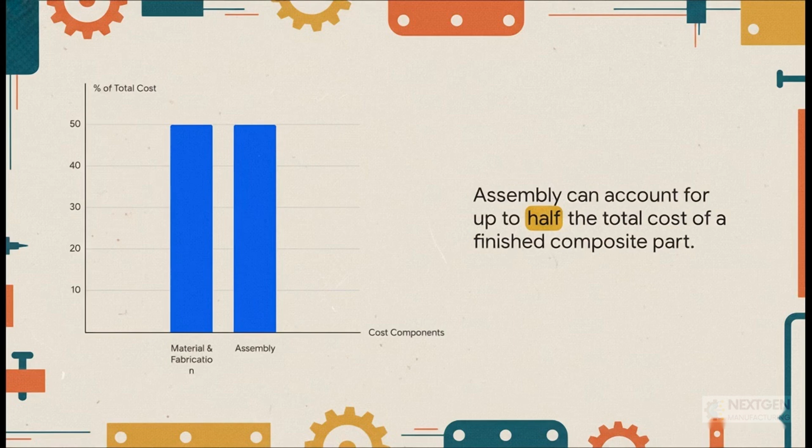Assembling these amazing materials is shockingly difficult, super time-consuming, and unbelievably expensive. Just take a look at this, it really puts it into perspective. The cost of the material itself and making the initial part, that's only half the story. The final assembly, all the trimming, drilling, and fastening can eat up to 50% of the total cost of a finished part. That's just a huge hidden chunk of the budget.

So that leads us to the big question, the one we're here to answer. Why is a process that sounds as simple as putting pieces together so ridiculously complex and costly when you're dealing with composites? Well, let's find out. To get to the bottom of this, we're going to go on a little virtual factory tour. We'll start with making the perfect cut, then dive into the high-stakes world of drilling without causing damage, check out the incredible art of fastening, and finally, look at the all-important final touches.

First stop, making the perfect cut. So a composite part comes out of its mold, and it's got these rough, uneven edges. They need to be trimmed down to exact dimensions. But you can throw out everything you know about sawing a piece of wood or metal. This is a completely different ballgame.

Here's the thing you have to understand. It's all about the material itself. A piece of metal is pretty much the same all the way through, right? It's ductile. When you cut it, the little metal chips that fly off actually carry away a ton of heat. But composites? They're the total opposite. You've got these incredibly strong, abrasive fibers, like carbon, just sitting in a much weaker, brittle resin that's a terrible conductor of heat. It just doesn't get rid of it.

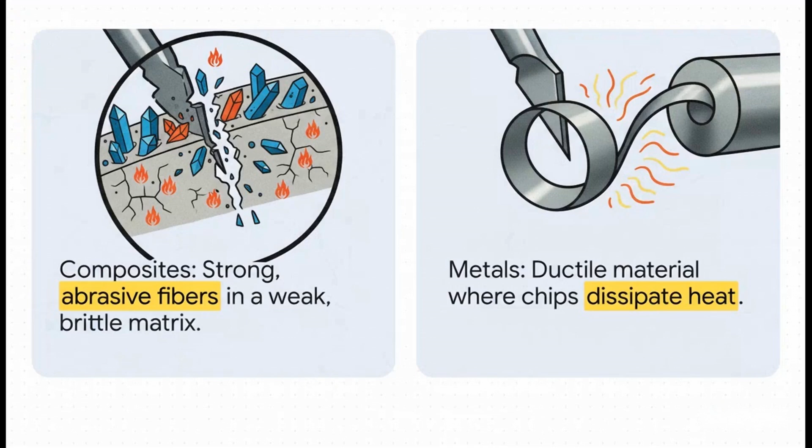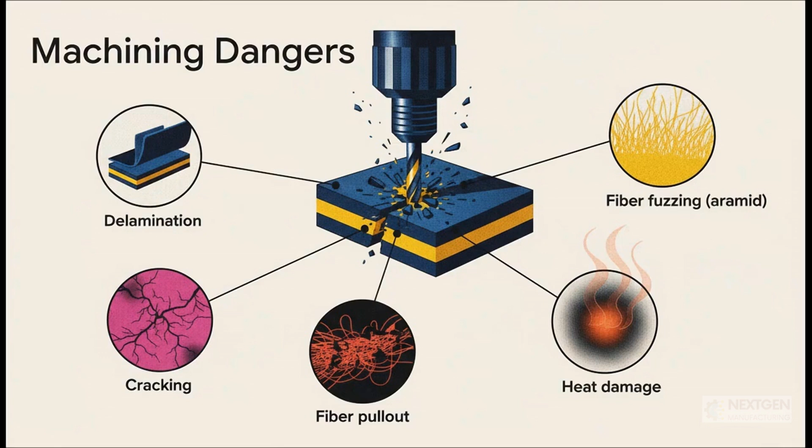And because of that weird structure, you're walking through a minefield of potential disasters. If you use the wrong tool or just the wrong technique, you don't just get a sloppy edge. Oh no, you can cause delamination, where the layers literally start peeling apart. You can get tiny cracks, fibers getting ripped out, or even heat damage that ruins the resin. And with something like Kevlar, you get this annoying fuzzing effect instead of a clean cut. Any one of these things can seriously weaken the part.

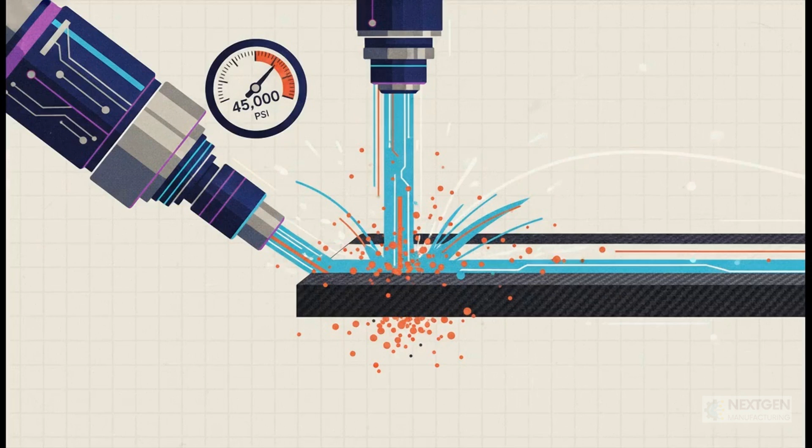So how do you cut a material that absolutely hates being cut? Simple. You don't. You erode it away. The go-to solution in modern aerospace is the abrasive water jet. And we're not talking about your backyard power washer here. This is a razor-thin stream of water pressurized to over 40,000 psi, mixed with a super sharp abrasive grit. It literally blasts the material apart on a microscopic level.

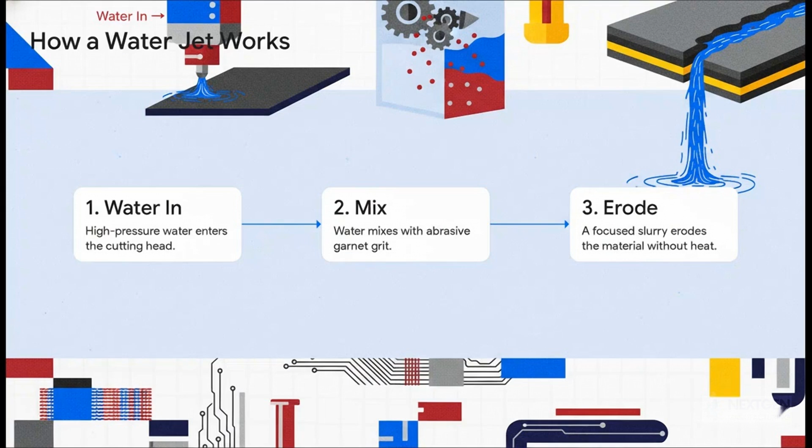The way it works is both simple and kind of brilliant. You've got this super high-pressure water that goes into a mixing chamber. In there, it creates a vacuum that sucks in these tiny, sharp particles of garnet. Then, that whole mixture, the water and the grit, gets shot out of a tiny nozzle as this focused, high-speed slurry. It's so powerful, it just erodes the composite cleanly, with almost no physical force on the part, and most importantly, no heat. Problem solved.

All right, on to our next station, drilling without damage. So our parts are neatly trimmed, now we need to drill a bunch of holes in them so we can fasten them together. Sounds easy enough, right? Wrong. In the world of composites, every single hole is a precision, high-stakes operation.

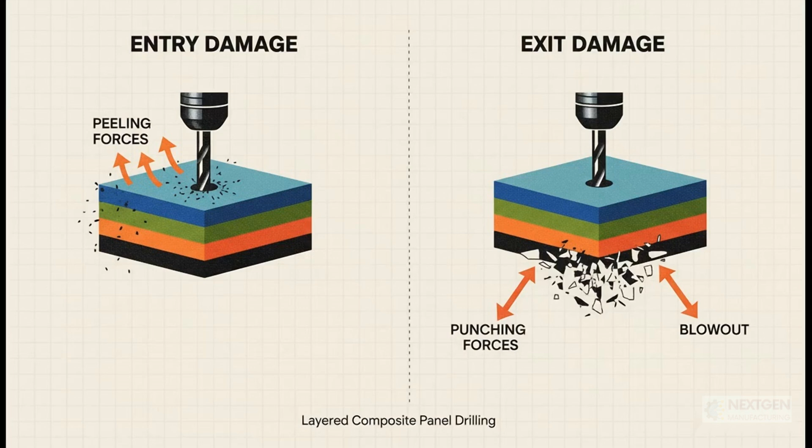And here's the heart of the problem. As a drill bit starts to enter the top of the composite, its sharp edges grab those top layers and create a peeling force. Think of it like a splinter on a piece of wood. Then, as the drill is about to punch through the other side, it creates a punching force that can just blow out the back surface. You can end up with a mess on both sides of the hole you just tried to make.

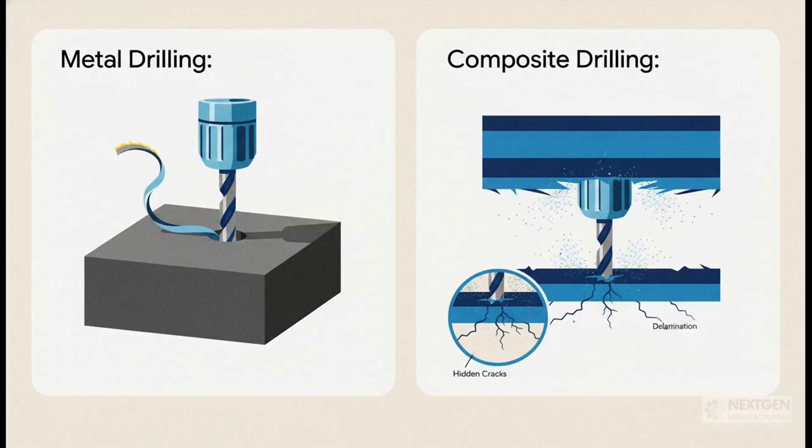And again, let's just compare that to metal for a second. With metal, a regular drill bit just peels away a nice, continuous chip. It's clean. But with a composite, that same drill is basically punching its way through a stack of brittle poker chips. If you get it wrong, you're not just making a messy hole, you could be creating hidden damage inside the part that could cause it to fail later on.

The only way to solve this is with some seriously specialized tools. There's no one-size-fits-all drill bit here. For carbon fiber, you might use a special dagger-style drill that shears the fibers cleanly. For something like aramid that loves to get fuzzy, you need a special C-shaped edge that actually pulls the fibers tight before slicing them. Each design is a custom-engineered solution for a very specific problem.

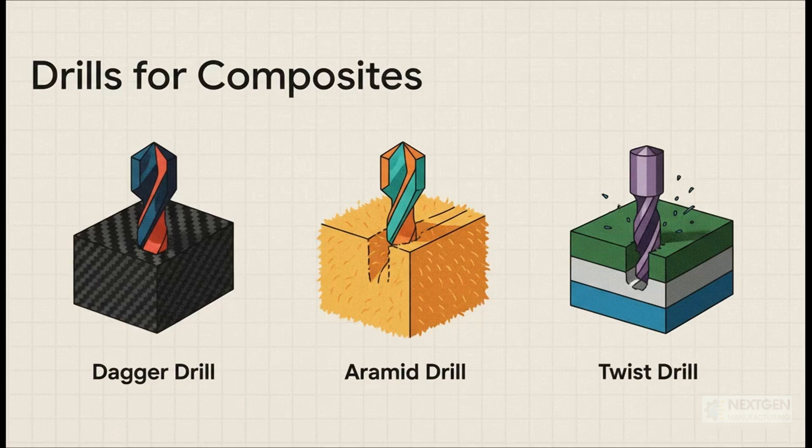But the shape of the drill is only half the battle. What it's made of is just as critical. See, carbon fiber is insanely abrasive. A standard high-speed steel drill bit, you'd be lucky to get 2 decent holes out of it before it's toast.

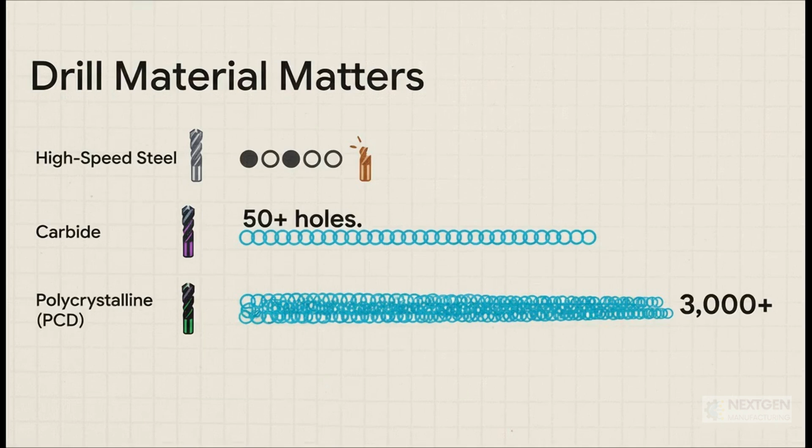If you upgrade to a carbide drill, you can get over 50 holes. But for the big-time automated production lines, they use drills tipped with polycrystalline diamond, or PCD. They cost a fortune, but one of them can drill thousands of perfect holes. It's the only way it makes economic sense.

Okay, so we've cut our parts, we've drilled our perfect holes. Now for what might be the most critical step of all, the art of fastening. This is where all that insane precision we've been talking about really has to pay off, because how you hold these parts together is a complete science. So before we can even think about what kind of bolt to use, we have to have a quick chemistry lesson. We need to talk about galvanic corrosion.

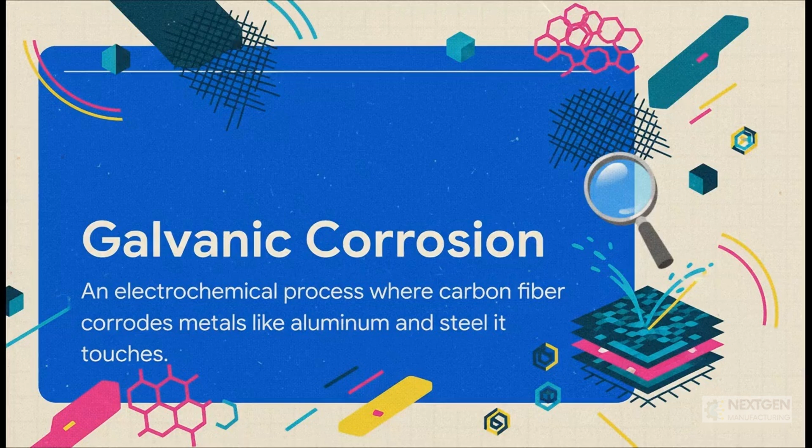Carbon fiber is conductive, and if you put it right next to a different metal, like aluminum, you basically create a tiny battery. And guess what happens? The aluminum starts to corrode and just wastes away. That is why you always see super expensive titanium or special stainless steel fasteners in carbon fiber structures. They have to be chemically compatible.

Now get a load of this number, 5/1000ths of an inch. That's thinner than a sheet of printer paper. If the gap between two composite parts you're joining is any bigger than that, you can't just tighten a bolt to pull them together. The bending force would literally crack the brittle resin around the hole. Instead, a technician has to precisely measure that gap and fill it with a custom-fit sliver of material called a shim. The level of precision is just mind-boggling.

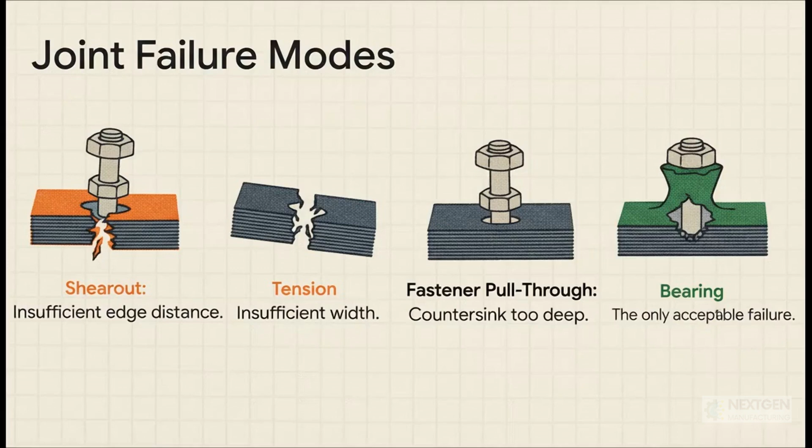And the stakes for getting any of this wrong are absolutely huge. A joint can fail in a bunch of catastrophic ways. The fastener can tear out the side of the part, it can pull right through the hole, or the part can just snap in half. The only way a joint is designed to fail is in what's called bearing, where the hole just slowly stretches under an extreme load without ever breaking apart completely. Every single detail is designed to make sure that's exactly what happens.

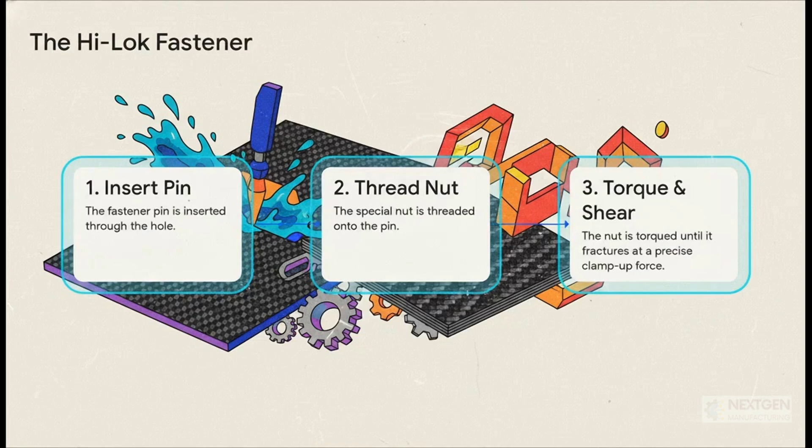So to get that perfect joint, engineers use these amazing little devices like the Hi-Lok fastener. It's a two-piece system. You stick the pin through the hole, and then you thread on this special collar. A tool holds the pin still while it tightens the collar. And here's the genius part: when it reaches the exact perfect torque, the top of that collar is designed to just shear right off. It's a foolproof way to get the exact same clamping force every single time.

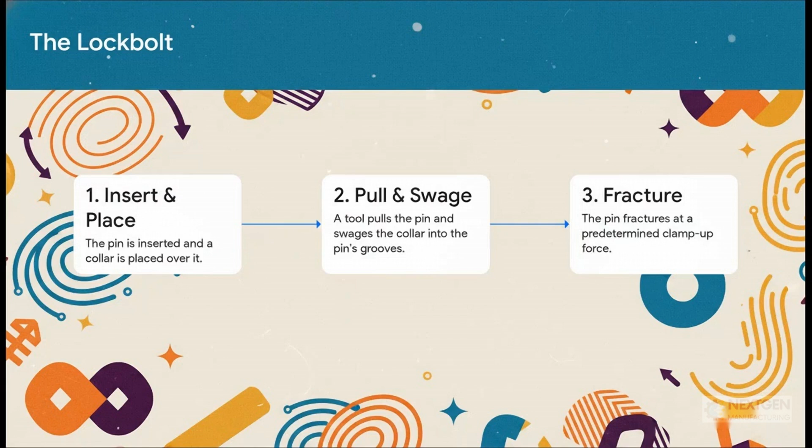Another really cool one is the lock bolt. This one doesn't even use threads. The pin has grooves instead. You put the collar over the pin, and a special tool pulls on the pin to clamp the parts together. Then it swages, or basically squishes the collar material down into the pin's grooves. This creates an incredibly strong vibration-proof joint. And just like the Hi-Loks, the pin then breaks off at a precise tension, guaranteeing a perfect clamp up.

We are so close to the finish line. Our parts are cut, drilled, and perfectly fastened, but we're not quite done. The final assembly stage is all about the critical finishing touches that are going to protect this structure and make sure it does its job for years or even decades. This comes down to two last vital steps. First, sealing. Think about an airplane wing that's also a fuel tank. Every single joint, every seam, every fastener has to be meticulously sealed up with flexible sealants to stop leaks.

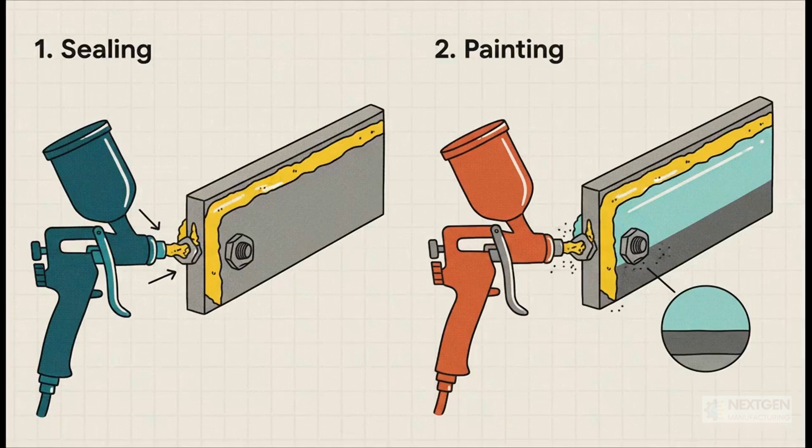And second is paint, which is way more than just for looks. A special epoxy primer makes sure the paint sticks, and a tough polyurethane top coat protects the whole thing from UV rays, moisture, and chemicals.

So, after all of that, the high-pressure water jets, the diamond-tipped drills, the self-breaking fasteners, we finally arrive at the real answer to the assembly paradox. The ultimate takeaway from all this complexity is this: the best, cheapest, and safest way to deal with assembly is to not do it at all. The entire philosophy of modern composite design is to design parts to be as big and as integrated as possible right from the very beginning.

And that leaves us with one last, pretty fascinating question to think about. We've just seen the absolutely incredible technology we've invented just to join two pieces of composite material together. But as our materials and our manufacturing get even smarter, are we slowly heading toward a future where the best, most elegant assembly is no assembly at all?